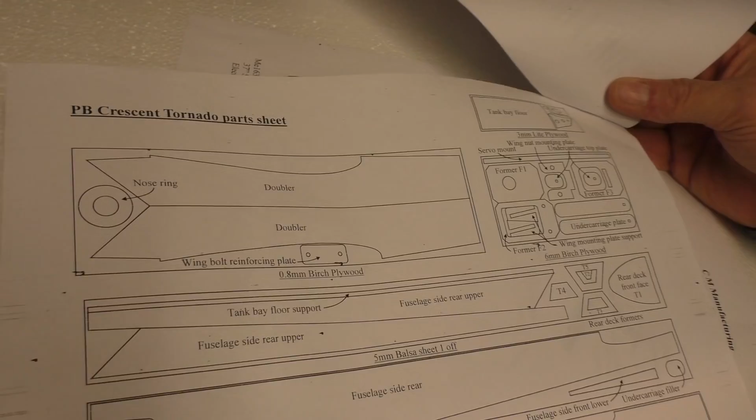And if you're going to build this, you've got to have the knowledge. You've got to have done your time. Hence you're coming to me, Pete. Oh, I'm coming to you. That was it, I knew it was one way around. We're going to join our knowledge and skills, though, aren't we? Oh right, yeah, okay, you're using my skills, right.

So that is it, really. There's a picture there, and then again, thanks Phil, thanks Phil, Cloud Models. They got some nice little kit. That Wasp E2K pylon racer looks fun, actually.

Anyway, right, so... oh Jesus Christ, I hate to see bits of metal like that shoved in bits of foam. Anyway, so you get some undercarriage legs.

Obviously we ain't using them. We're not using that either. We're not using that, and we're not using that. But if anybody wants them, let me know.

Now the wings, we're going to leave it all in there for the mo. The wings are there, foam veneered, obviously. Canopy, there's the canopy for that. It's got a foam veneer horizontal stab as well. You can see them all packed in there nicely.

So that's going to be lovely jubbly. And then there's a load of wood down below. Tips there, wing tips, mate, maybe the odd bit of chafing. So yeah, it's a box of wood with some foam wings and horizontal stabs.

Brilliant, so let's get rid of the stuff we don't need. Exactly, we put it on the floor because no one will notice. Yeah, go on the floor. That's the only room we got left. It is, now we've had a clean.

Oh, right, here we go. Here's the wings. Yeah, sorry, I mean the light's not very good, unfortunately. If we move it in front of the light, Pete, maybe it'll show up better. There you go.

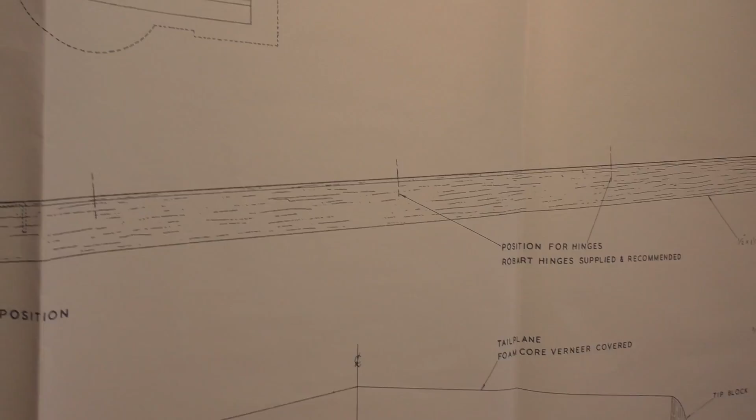There is the plan, I mean it's a big plan. It's got a tail plane on it. There's the rudder, wingtip blocks, blah blah blah. Exactly the same construction as the Bullet, really, just on a bigger scale.

So yeah, as you can see here, it shows some detail for putting in the... it says Robart retracts. Yeah, well, we ain't got those. No, we've got blue ones. Oh, blue ones, yeah, we haven't got violet, mate. We got to go blue with the colour. We'll show you that in a minute, because no expense has been spared on this plane.

No expense spared. Right, and here's the proper drawing that we all want to see, really, the fuselage. Oh, do you want to hold that end? There she is, she's big, isn't she? So she's a tricycle, see there.

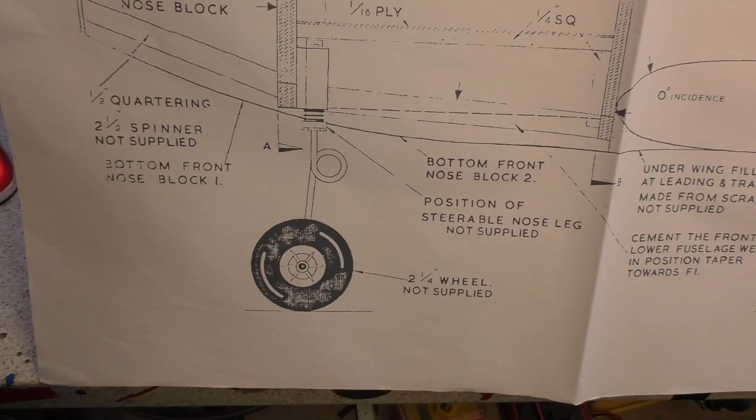Not a lot you can say about it, really. It's just like slab wood stuck together and shaped with some formers.

So yeah, oh look, there's the retractable option. Now you can see the wheel retracts up into the nose, which will be nice.

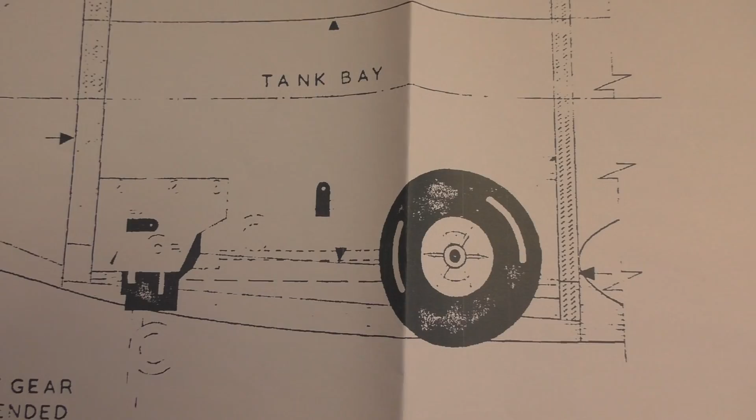I mean, there's not a lot to say really. The wing's bolted on, £7.5 it should be. Well, £6 or 7.5 with retracts. Suggested engine 60 to 61. Designed by Ivor Fairbank and drawn by J Woodley.

There you go, and there's the old Crescent house, Springfield Industrial Estate, Burnham on Crouch. Yeah.

So yeah, right, let's get rid of all this crap, and let's have a look at what we bought for it. Like I said, Pete's been so champing at the bit, he's been buying all the stuff.

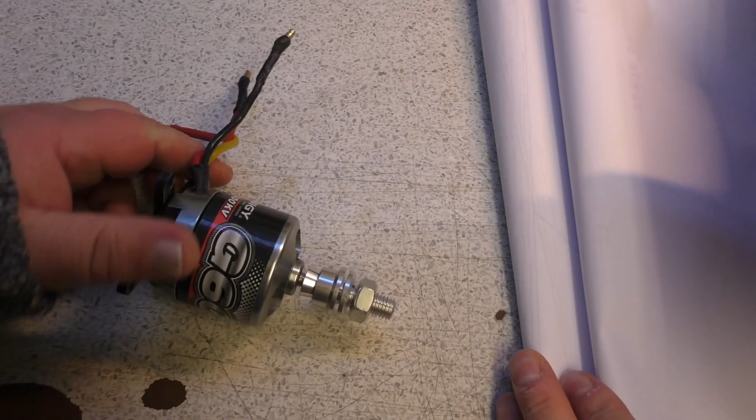Oh, and begging and stuff as well. But yeah, Hobby King haven't been too quick. So there we go, we've got a G60. This is a double swapper, this one. This was swapped for something that was swapped for something, and we ended up with a G60. So there is a nice G60.

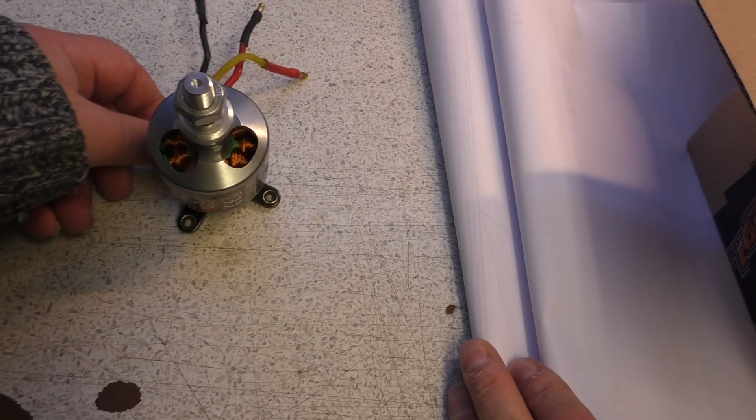I don't think that's had any run in, that one. It's second hand, but I don't think it's actually... it was on one of my planes, in a trainer. It was on a Pete's Problem plane, wasn't it? It was, the Seagull trainer, the blue one. It had a 60 in it. So we swapped that out for a 40, yeah, 45 or whatever, and so we can procure and use this one instead. So that's a 400 kV, so we're going to be probably running 5S on this thing.

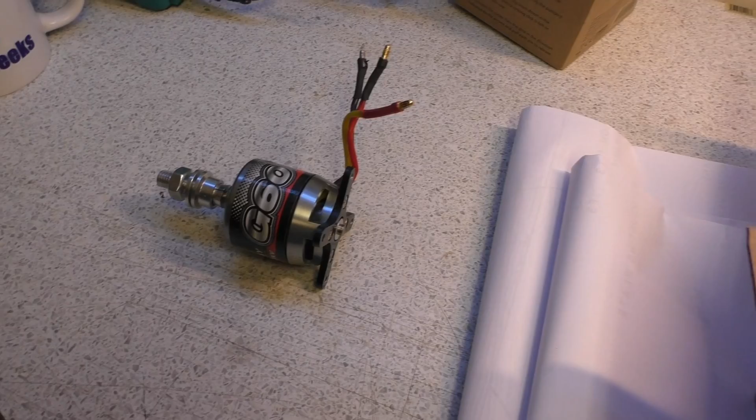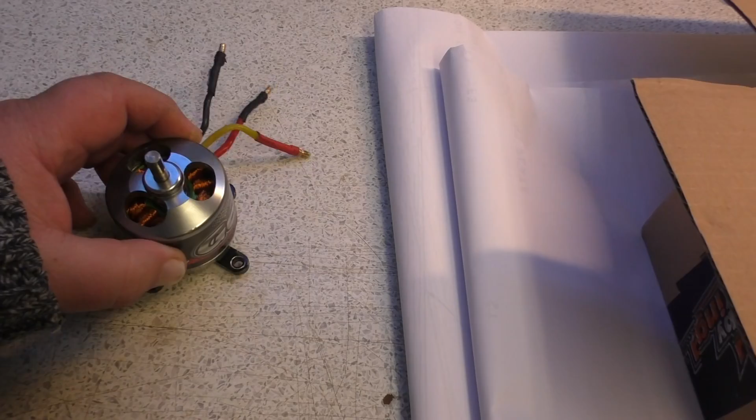We're probably going to do a mod on this. Somebody emailed asking if we could make one of those prop adapter things we've made in the past to go on a G60, and it just so happened we got a G60. We'll probably make a prop adapter for it, because the only option on these G60s is the collet type. We'll come up with a modification that gives you a mount on the front, and I might even drill and tap some mounting holes so it can screw in like the other style, rather than just clipping onto the shaft. We'll see, I haven't worked that out yet.

So that's the motor. 3 retracts? Retracts, 4 retracts just in case. So we've got these.

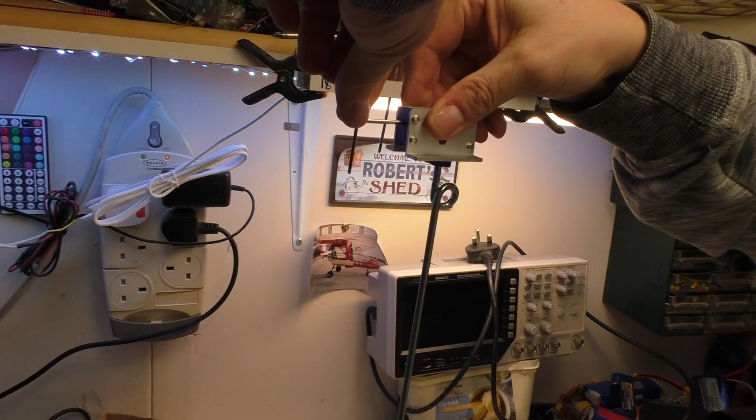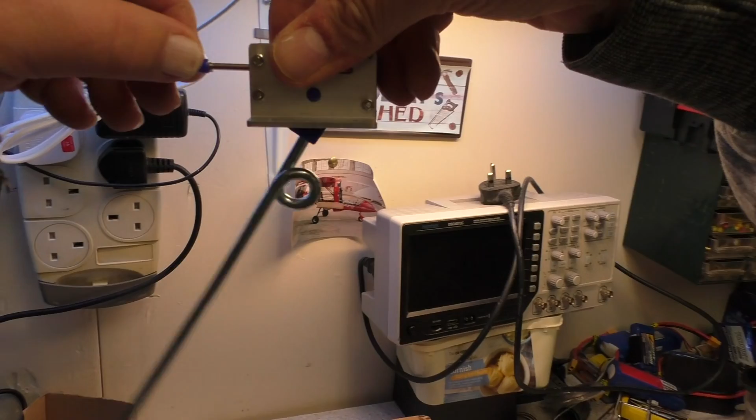Now, I said we were going old school, and these are. Pete, would you like to demonstrate how it moves? You pull that lever there, and it locks, and down it comes. You push it, and it comes up. So it's driven by a servo, just a push rod, up and down, classic mechanical style retracts.

Yeah, we've got 4 of them, we only need 3. Made in Vietnam. These were from Hobby King actually. Oh, you get axles as well, look, there's some axle parts in there so you don't have to do a sharp bend on the wire or anything. I think we probably might be taking them out and using the originals from the kit. I don't know yet, we'll see.

Yeah, with these retracts, they've actually got a grub screw down there, so you can actually remove these undercarriage legs and put your own ones in if you want. So we may be going back, we just need to compare the size. They look a little bigger actually, so we might end up using these nice chrome ones anyway.

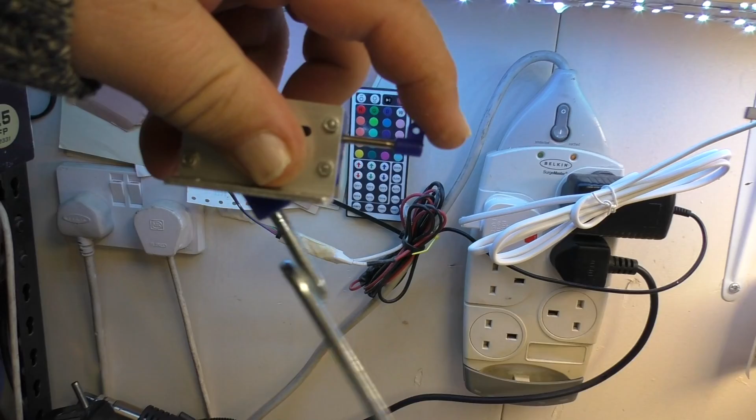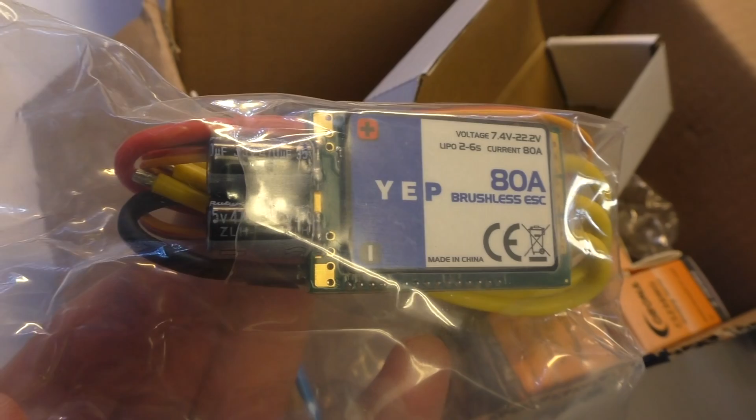So we're going to use one of those for the front, and then the other 2 for the wing. So what else did you get, Pete? Hobby King had so little stock in the UK that I had to get a Yep. I hate them, I completely hate these Yeps, but it's all they had in around that size.

Yeah, they're weird, the 2 Yeps that I've had always lose their programming and start bleeping at you. Very annoying. But we've got the programmer for those Yeps, which is a bonus. It's just that you have to mount the programming socket in the side of the fuselage because you have to program it every flight.

Right, he's got a spinner. That was Hobby King, wasn't it? Yeah, I think it's a 2.5-inch one. It's big, but nice and white. Shame we needed black at the moment.

Right, and we've got some servos, the metal gear, analog metal gears, not digitals. They should be plenty for what we want to do. And we got some horns and other bits and pieces in there, and a bit more of axle. And that's what we've got so far.

Look at Pete, it is. Oh, there were some collets somewhere, weren't there? Yeah, I bought the collets, didn't I? Oh, do you know what, I probably laughed so much at them that they might have disappeared. Oh, with the wheels, where's the wheels?